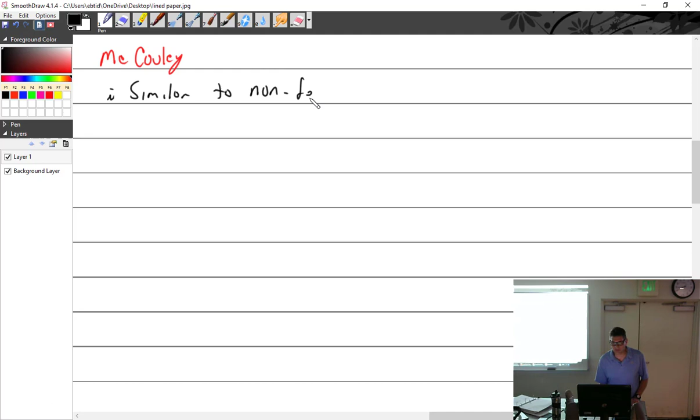Propeller is really not any different than the other propellers we're seeing. So it is backwards. Or they're correct and the single engine is backwards, I don't care how you look at it. Similar to non-feathering. We did a non-feathering before. Now we're doing feathering, now we're in the feathering system. This is technically a B right here. Can't see red, that's why I changed it to black. Similar to non-feathering model, but uses counterweights.

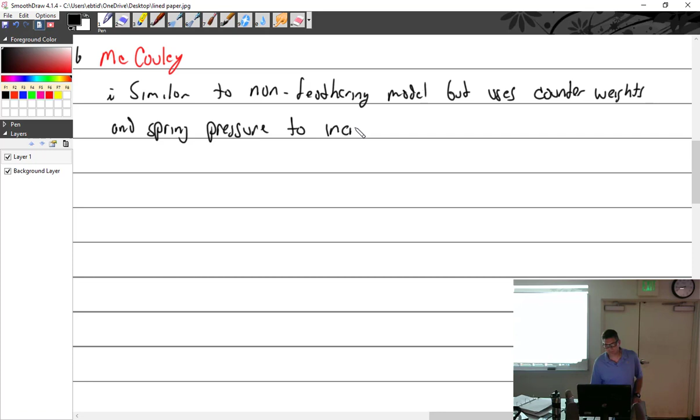Uses counterweights and spring pressure to increase blade angle. And the single engine did what to increase blade angle? Oil pressure. So now we're not using oil pressure to do that. We're using counterweights and spring to increase the blade angle and oil pressure to decrease blade angle.

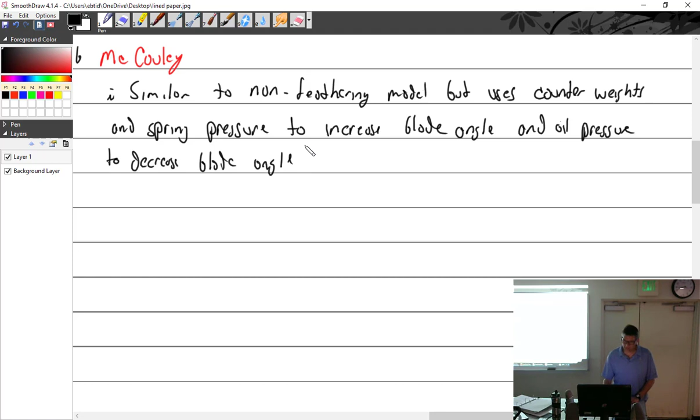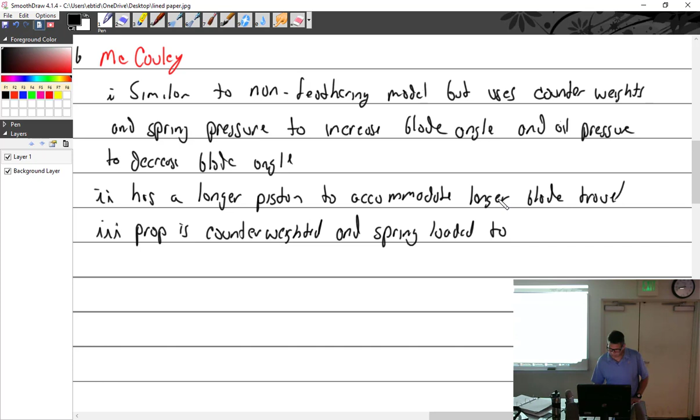Visually, they're different. It has a longer piston to accommodate longer blade travel. So the prop, again, prop is counterweighted and spring-loaded to feather if oil pressure is lost.

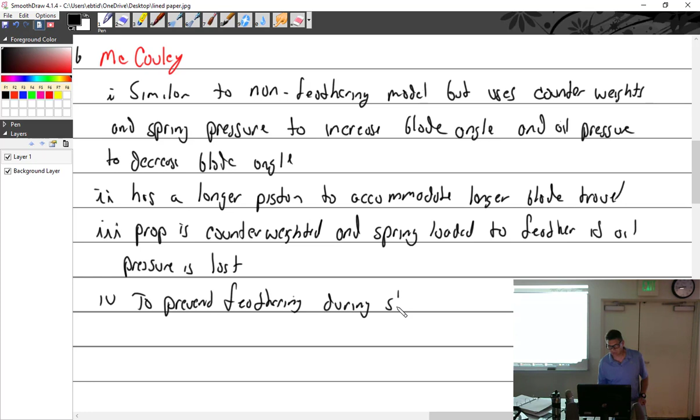Which is great. But what happens when we shut down the engine? What's the oil pressure do? Lost. Yep. And there's a big spring in there. So every time you shut down the engine, it's got to feather. But that means the starter then has to fight this paddle, and that would not be good. So we can't have that. So to prevent feathering during shutdown, a centrifugal latch is used.

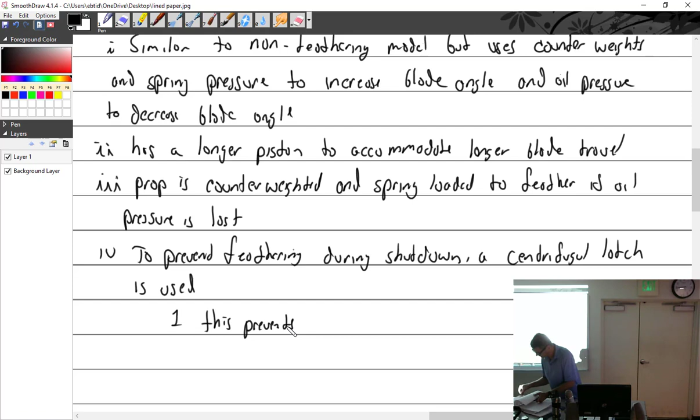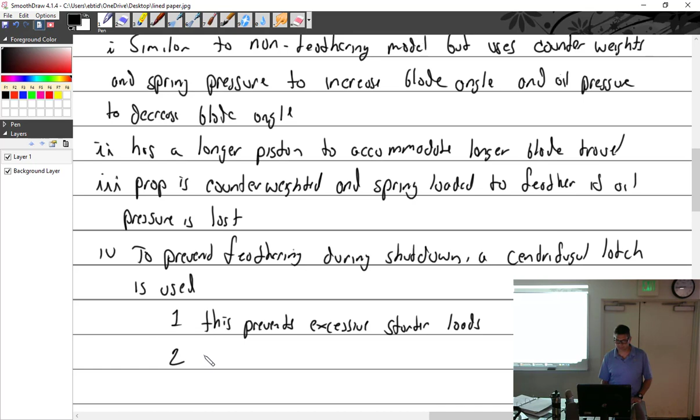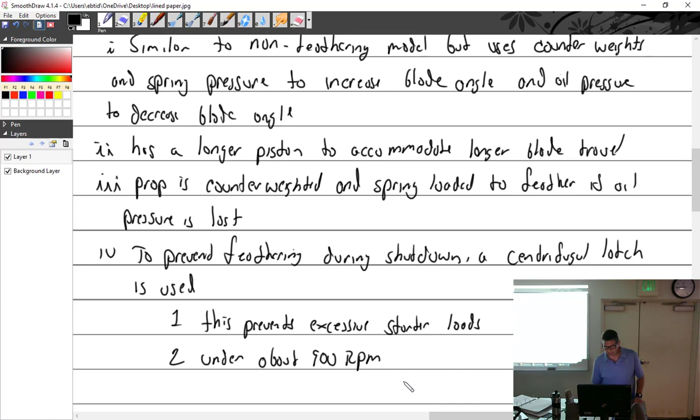Can you explain how that centrifugal latch works again? Okay, let me see. I remember we went over this yesterday. I'll write these two things. This prevents excessive starter loads. Under about 900 RPM, a latch engages that prevents the prop from feathering.

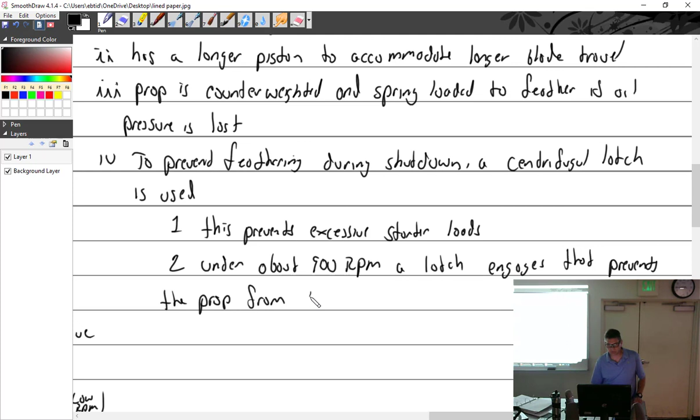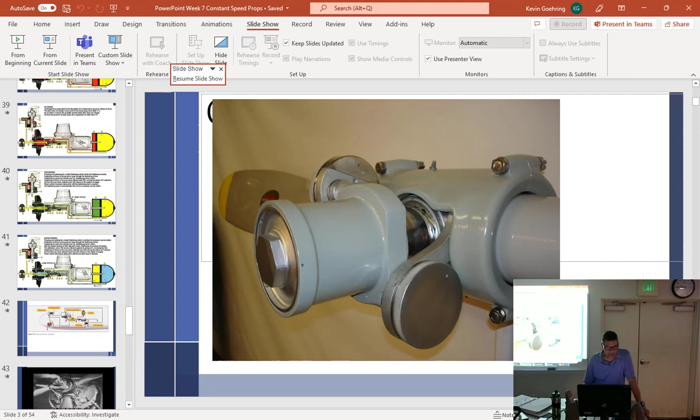All right, there's several different types of feathering locks. Let me see if I have a picture of any of them. I don't think I do. Well, that wasn't helpful. That would be negative. Okay, so I will explain. There are several different types. Unfortunately, we only have one example in the hangar, and it is oil operated, which is antiquated, no longer used.

So I'm going to let you guys figure out how to do it, because you should be figuring out how things work. That is my goal for you, to take something apart, like the governor you were taking apart. I always feel bad when you come up to me and say, I don't know how this works, where's the manual? At this stage, everybody in here can take things apart and ask, how did they make it do that? What's it doing? That's how you get this memory, so at the DME you're like, counterweight's doing this and that, I can picture it all in my head.

So we have one model of the McCauley that has an oil/centrifugal latch system. Some of the Hartzells have more of a centrifugal pin. The most simplistic version: the blade hub rotates this way. On the blade hub you can put a collar with a hole in it and a spring-loaded pin. The pin drives into the hub when the blade is like this. As you start the engine, centrifugal force lifts that pin against the spring, allowing the prop to move. When you slow down, it goes in.

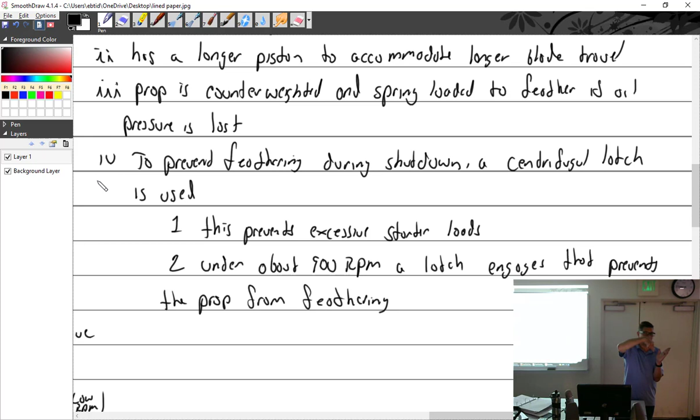Now, if the blade is at high angle, it won't catch. That's a good thing, because if you have an engine problem in flight, chances are you were at cruise pitch or higher, not low pitch. Things go bad, the engine loses power and slows down. The governor's going to try and bring it in, but in theory, before the pin catches, you would go, okay, we're going to go to feather.

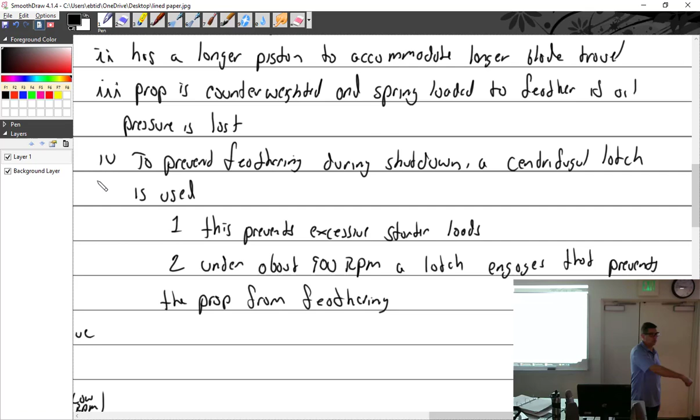So to go to feather, you're just going to grab it, go all the way to the low RPM, and then usually there's a little indent, a detent, some sort of gate, something, so you don't inadvertently do it, but you'll pull it all the way and go to feather. Sometimes you lift up, sometimes you're just way back there. Then it goes to feather, and then the locks don't work. But it's always just nowadays some sort of function of centrifugal force.

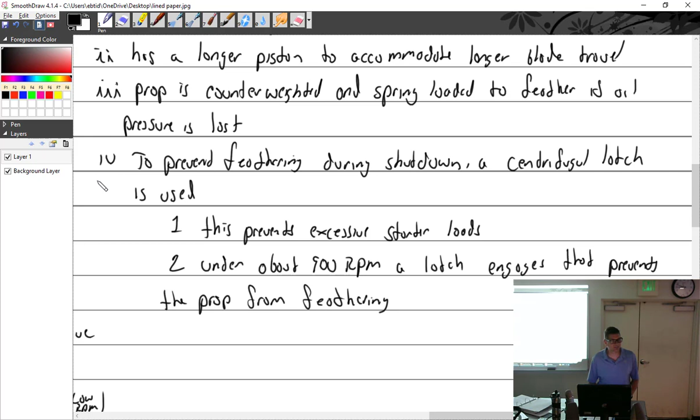Does that help? So even if it's spinning, if the prop goes too far forward, would it catch? Flat. It will, but only at low RPM. Only at low RPM. So only at about 900 RPM. Yeah, just pretty stinking low if you're flying. I don't even think you can get it that low flying without the windmilling effect. It's just going to keep it higher, wouldn't you say? You'd stall first. Yeah, so it's not a risk.

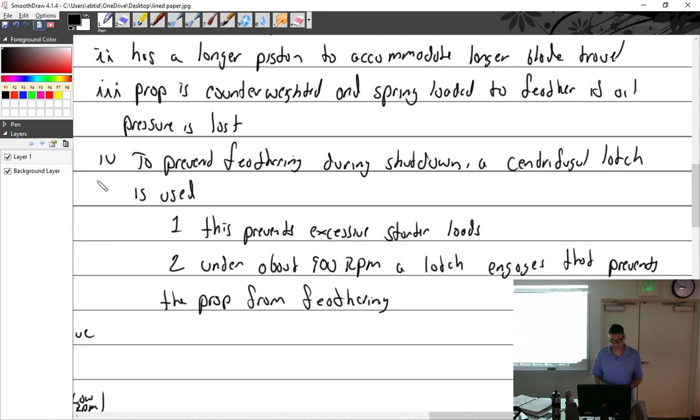And for maintenance needs, if you want to feather it on the ground, usually the way I would do it is I would just have my hand on the throttle and hand on the prop, and I'd pull the prop back to feather, and as it starts to feather, you can hear it, just start pulling back the throttle, shut down. Because you don't want to leave the throttle open and let it try and shut the engine down with the prop. That's bad.

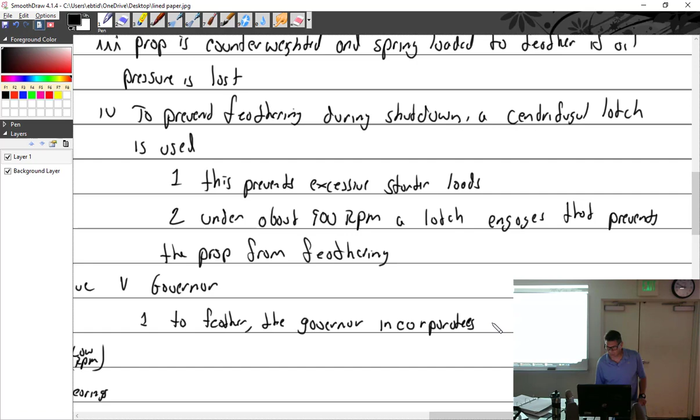Let's see. Oh, got this. Governor. Remember that thing? It's a thing that exists. So to feather the governor, the governor incorporates a lift rod, connected to the speeder rack. The lift rod mechanically grabs onto the pilot valve and moves it up into the feathering position.

So the lift, I really thought I had a picture of that, but apparently I don't. You did, I saw it. Let me see. It's that right there. Thank you. Oh, there we go. So spindle, lift rod, right in there. So it just comes in, lifts it up, grabs a speeder rack, pulls the whole thing up, realigns the pilot valve, drain off all of the oil, let centrifugal force, spring pressure, and or air pressure do its job, and there you go.

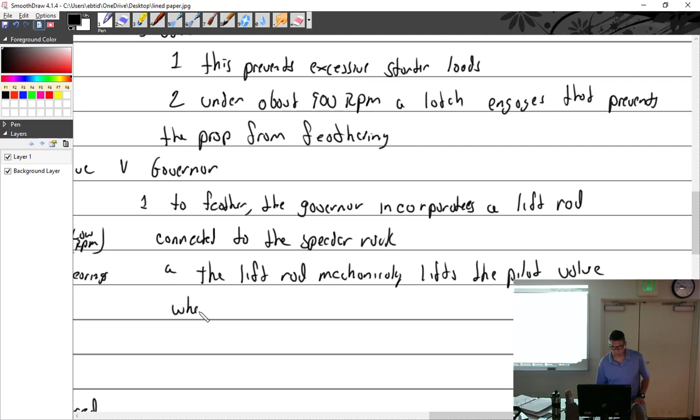What is this? 1A. So the lift rod mechanically lifts the pilot valve when cockpit control is moved to the feather position.

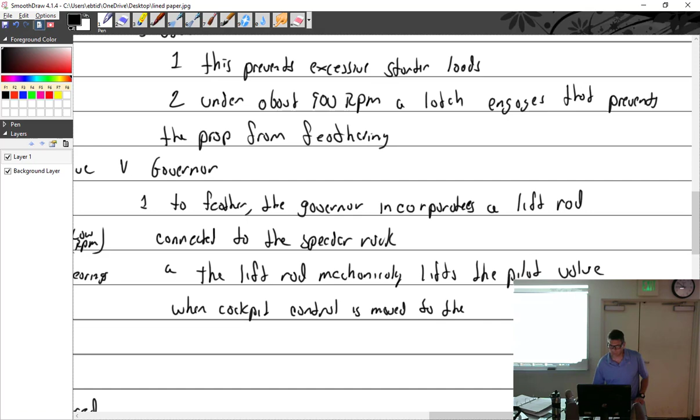All right, to unfeather. Well, you got to have a way to make it not feather. So there's a couple ways you can do this. Way number one is you've now put the prop in feather. Its blades are out. It's completely stopped. Maybe you decide the engine's okay now. Got better. Healed itself. And so you need to restart it. If you don't have any system for doing that, all you're going to do is take the blue knob, bring it out of feather, and hit the start button. And it just has to fight the air. And as the starter starts going, so is the crankshaft, so is the governor, so everything starts working, right?

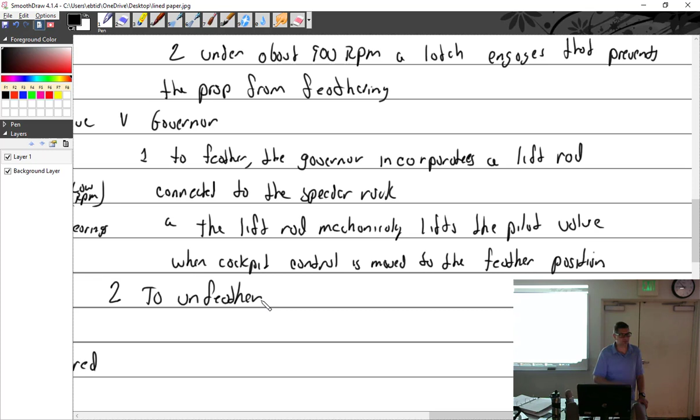And so it takes oil pressure to bring it flat. So the engine will try and start, it'll kind of get going. And at the same time, the starter is turning on the components, so it's going to start putting oil pressure up in there, and it's going to start to come out of feather. Now, as soon as it starts to come out of feather and it catches the wind, then it's going to air start on its own, and then you're off and running. But it's painfully slow. I bet it is. I've never done it in the air, but I've done it on the ground, and it's like, whoo, man.

All right. Way number two is with an accumulator. An accumulator, something that you guys are going to look a lot at. These are just two examples of an accumulator. We can look at the top one first. It looks like a toilet ball. And we have this rubber diaphragm in here. On one side is air and the other side is oil, with an air valve, which means you charge this with a bunch of air. Let's say there's 100 PSI in here. As oil fills this up, it will compress that air, leaving this oil under, say, 100 pounds of oil pressure, right?

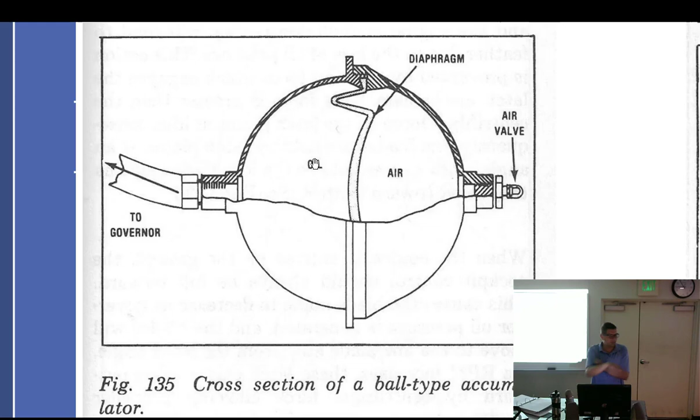And so the way that works is this is open usually to the governor. So the governor is charging this up. And then when you go into feather, it will shut off a valve, block the oil in here under pressure, lift the pilot valve, block off the oil going into this because it's all kind of in the same system. And then that keeps it charged. The prop goes to feather because of oil, because of centrifugal twisting force, because of spring pressure, because of air charge in the prop, and now it's feathered. Now when you want to unfeather, and you go, yeah, I thought this one had it.

Sometimes I'll even show the passage where it goes to the accumulator. So then when you go into the "I don't want it feathered anymore," and you push forward out of the feather, it opens the gate that blocked this off. This goes to the governor. The governor sends it right now because the pilot valve is showing that we're in an underspeed condition.

And I'm going to screw that one up. So it's thinking it's not spinning. But you're going to realign the valve in here, and then the oil goes right through here to the propeller and brings it back in.

That's ball type. And they also have the same thing, it's just kind of flat. So you could actually have a piston that moves back and forth in there. So put the air on one side and a piston that'll move, or a spring. You can even use a spring. Makes sense, I hope.

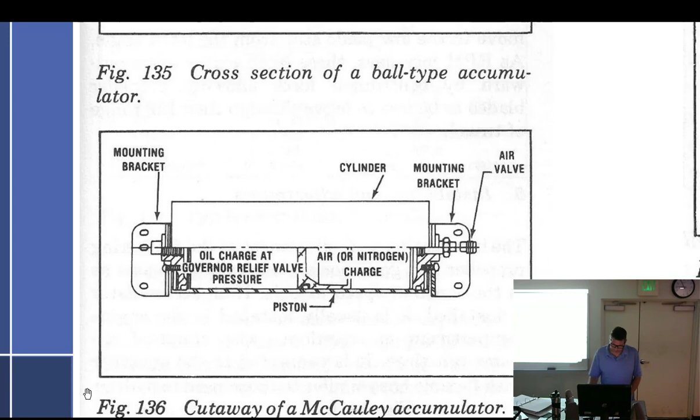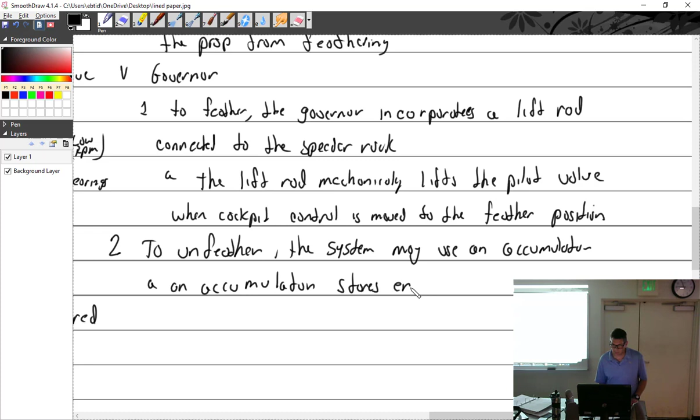Let's finish this. To unfeather, the system may use an accumulator. An accumulator stores engine oil under pressure. Yeah, that works for me. Maybe air pressure, or spring pressure.

Especially if it's air pressure, you gotta check your air pressure at annuals. And also, we often check the accumulator action. We'll go ahead and feather the prop, and then test the accumulator, bring it out of feather. Because you don't necessarily have to have the engine running at that point. It'll do it on its own. The guy on the Hartzell videos said every 100 hours or month.

Okay, that wasn't an accumulator. That's the Hartzell prop that we haven't looked at yet, where it has the Schrader valve on the front, underneath the front of it. That's not an accumulator. That's like spring pressure and centrifugal twisting force assist. It's one of the fixed forces. Thank you, that's the word it would have been much better to say. Accumulator: air pressure or spring loaded. Got that.

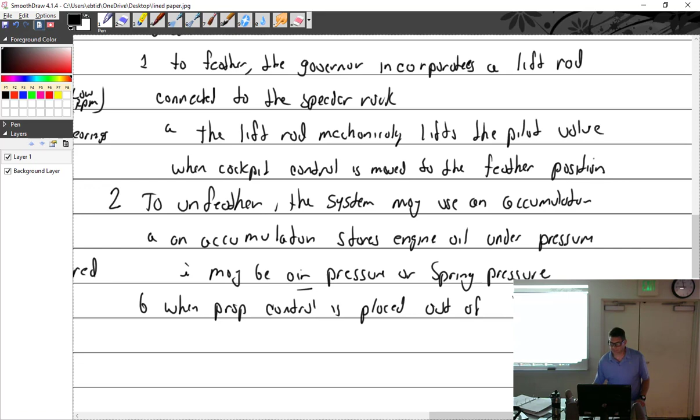B, when the prop control is placed out of feather, a ball valve in the governor will release oil pressure from the accumulator to the prop to unfeather.

I'm trying to think of the two valves, where one went to the prop and one drained off, and the pilot valve moved. Is it in line with those? Yes, it's part of that little system. Okay. What do I need to say?

Systems without an accumulator must start in feather. So systems without an accumulator must be started in feather position.

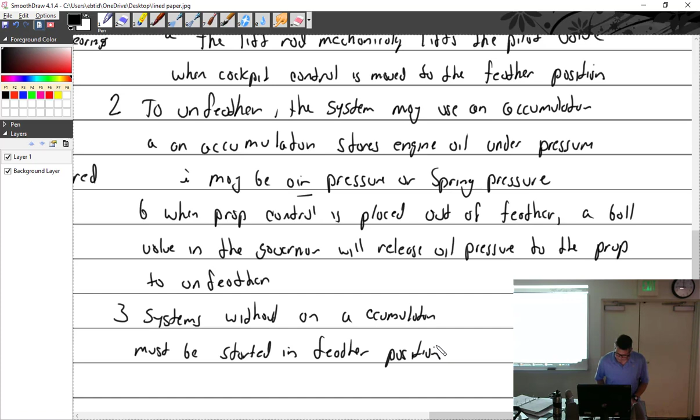As the engine is rotated, governor pressure will start to unfeather the prop. Prop will begin to windmill, helping the starter as governor pressure increases. Prop will move to low pitch. Oh, that's what we got. That wasn't really tough.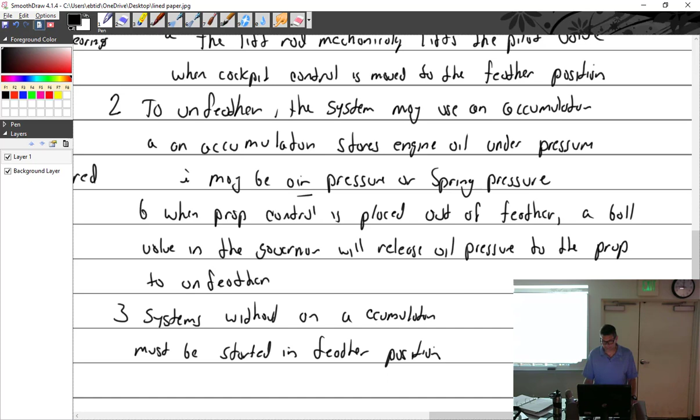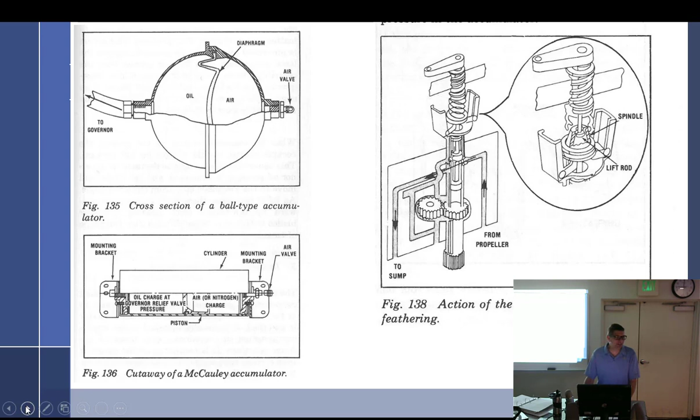Is that just because you don't have a good imagination? It's more of an imagination issue, something not right in my imagination. You tried mushrooms or anything? Not gonna answer that. Would have been funny if you would have said, you mean today? This week?

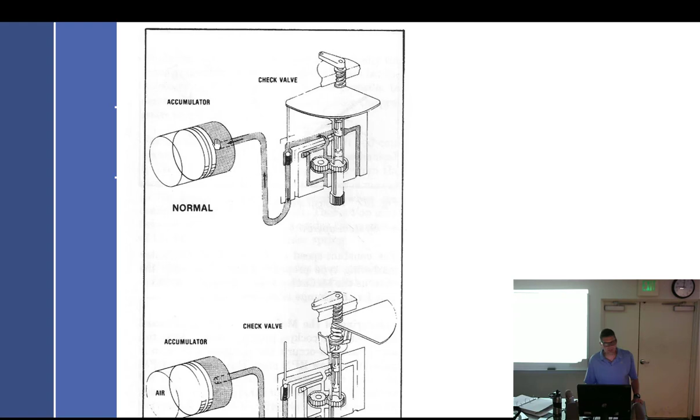Oh, look, I have a picture. Maybe I can make it smaller. There, can you see that? Accumulator. Check valve. All right, so you got a check valve. It comes through the little check valve, which means it goes one way. Comes in, charges up the accumulator during normal flight, just in case we need it. I don't know what the big plate is.

Oh, I know. It's to push down on the ball. So we go into feather without the accumulator action, right? We pull the levers all the way back, cutting off the oil pressure from the governor. Prop goes into feather because of its fixed forces.

Child. It's like being at home sometimes. 10-year-old. Older. Love you anyway, though.

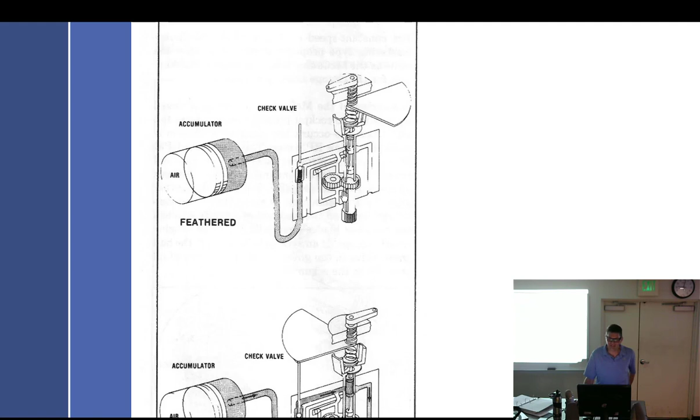All right, so it goes into feather, and they want to unfeather it. We rotate it around. This comes over, pushes down on the little ball, releases it. This comes out through, goes to the propeller, and there we are, off to the races.

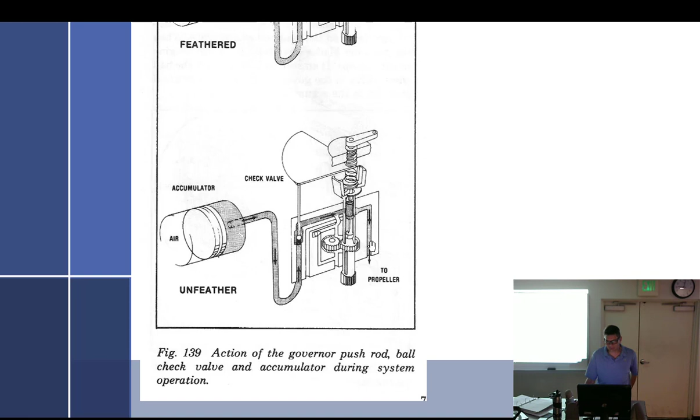All right. Where'd we leave off? Hartzell. Well, I guess I just kind of put them all together here. No. McCauley. There we go. McCauley feathering is where it kind of left off. Counterweights move prop to high pitch. Oil moves prop to low pitch. Counterweight spring pressure. All right. Underspeed oil, same with the Hamilton. Underspeed: oil to prop to decrease pitch. Overspeed: drain oil to increase pitch. All right. That brings me to.

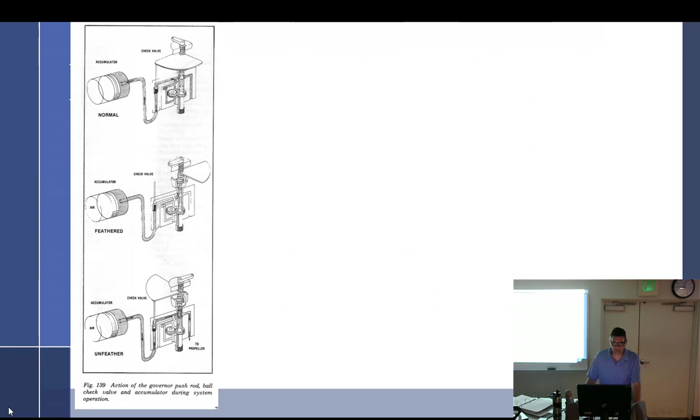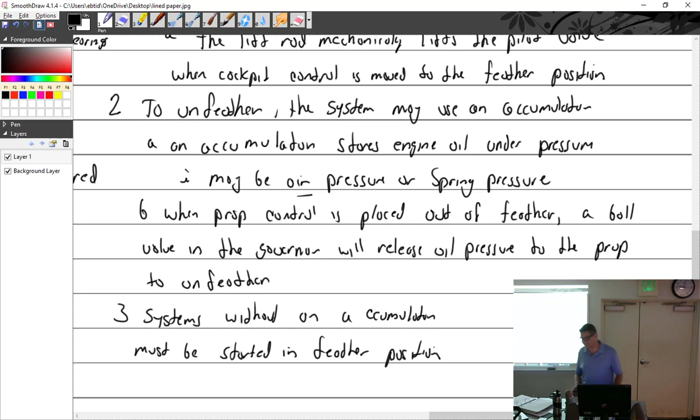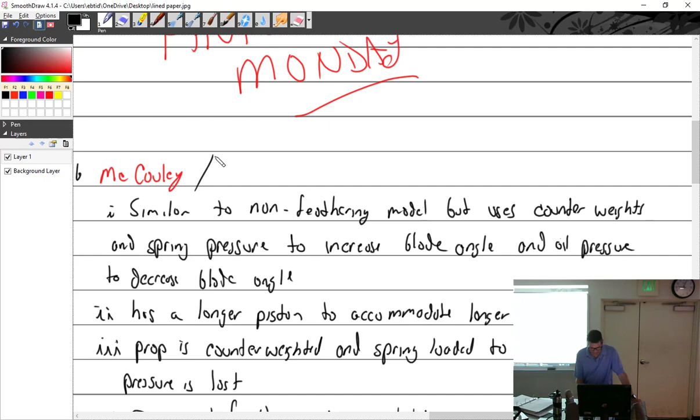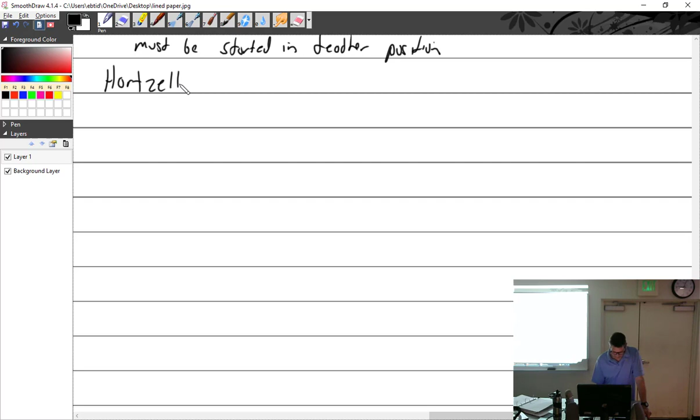I guess I just skipped right over the Hartzell pictures. Hartzell. What can we say about that? Is this less basic? Man, I don't know. It's the same thing. We could just say McCauley / Hartzell. There's really not going to be a whole lot of difference. There's a little bit, so I guess I could write some other notes. Hartzell, same thing, but different. Same as McCauley.

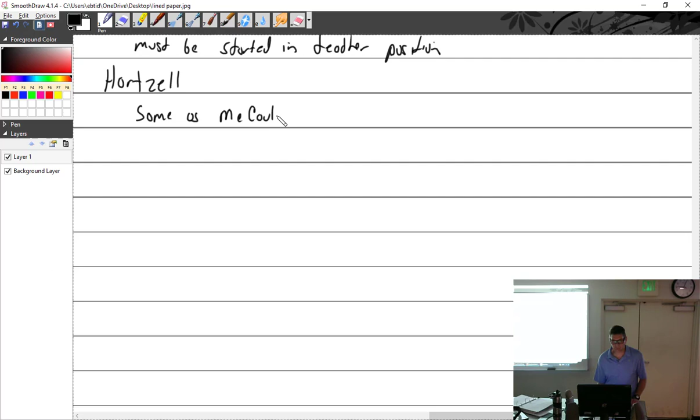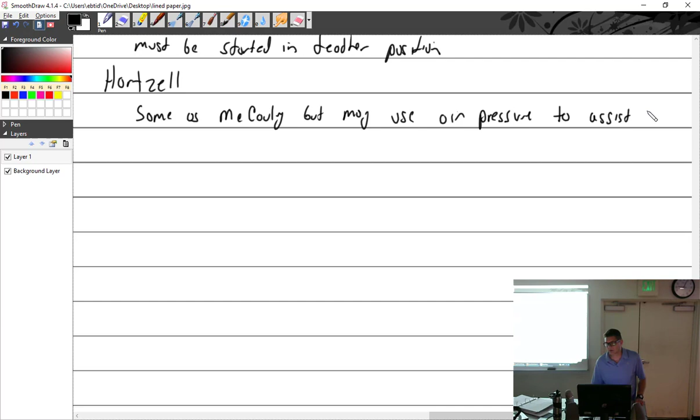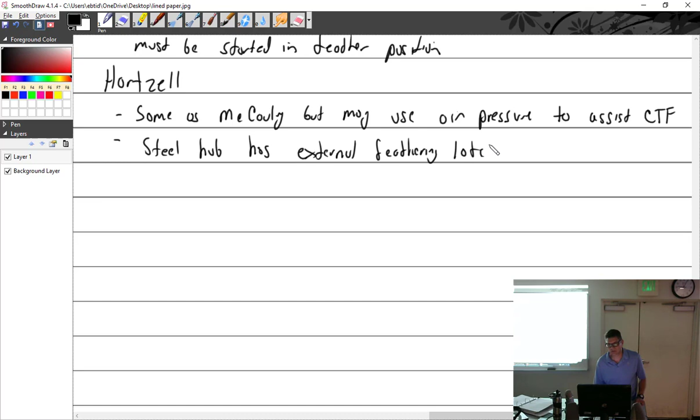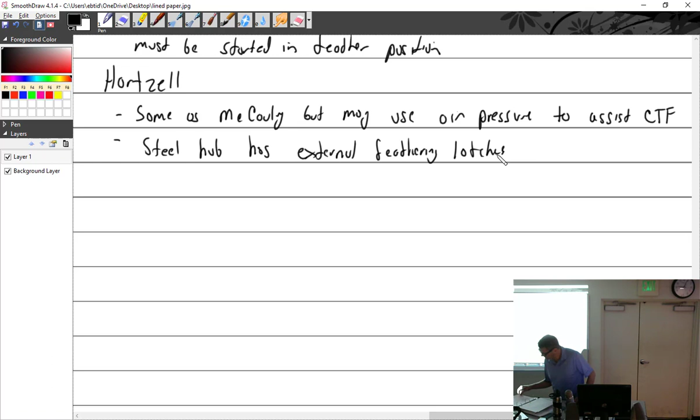But may use air pressure to assist CTF. Let's see. Steel hub has external feathering latches. Compact. That's grease. All right, so speaking of air pressure, we got that. Let's talk about operations, obviously the same. So maintenance.

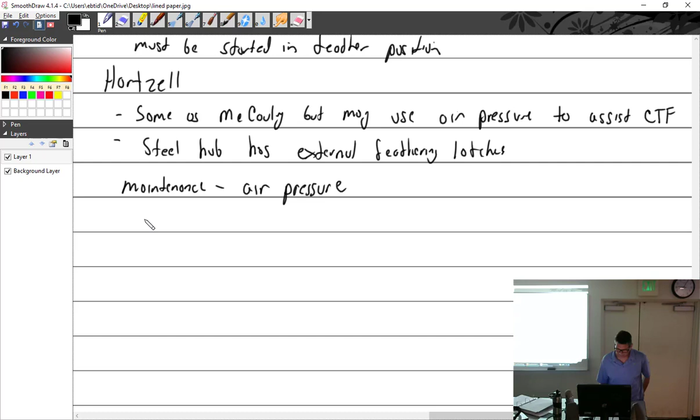Maintenance. Let's talk about the air pressure. How often is that checked, Tobias? Every 100 hours or month, whichever comes first. Yep, and I know aircraft owners have it in their iPhone. Little alarm goes off: I got to go down to the airport and check my air pressure, it's been a month. Because you ask some owners how often you check the air pressure in your prop, and they say, air pressure? I've never heard of that. Some props will need the air charge checked.

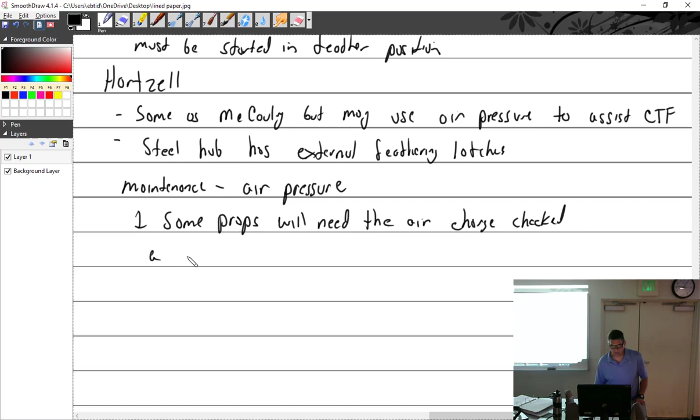Air pressure is about 150 psi. Follow the chart. There's a chart where you put the air charge in, and it tells you at what temperature you're at, how much air pressure should be in the propeller.

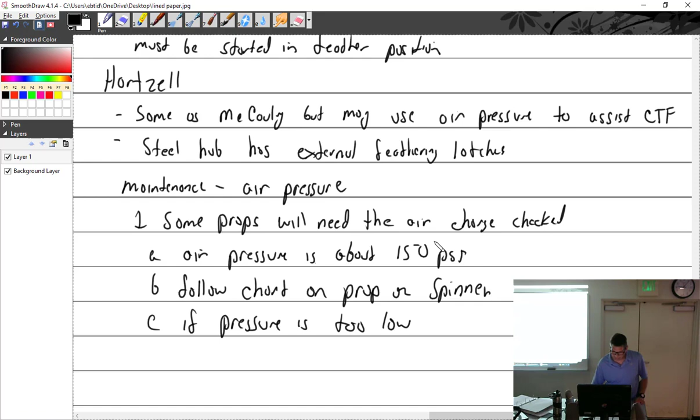So if pressure is too low, what's going to happen? You're going to get too much oil pressure? It's a Friday. If air pressure is too low, you don't have enough force, so what problem would that lead to? Not enough assistance. Can't go to feather. Yeah, not enough assistance towards feather. So it may not feather. Also, it may surge or overspeed.

Why would it overspeed? Because it's too low of an angle. Yeah, too low of an angle. Air charge isn't bringing it over. So surging is kind of looking for its right spot. Would that be like bootstrapping, where it overspeeds and continues to overspeed? No, it's just everything is behind. By the time it finally starts moving to high pitch, it's like, now we need to speed up, but it can't. Then it starts to speed up and goes too far that way.

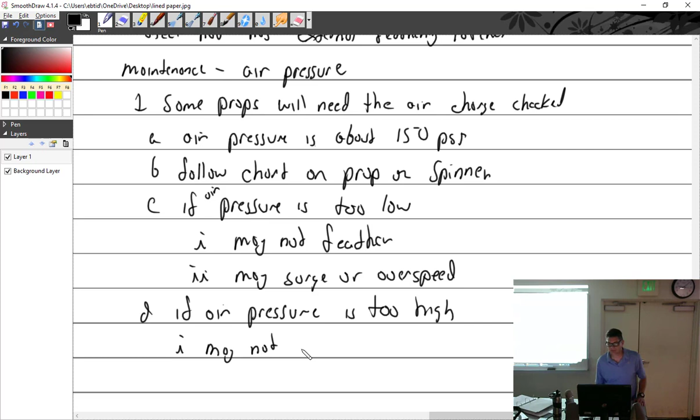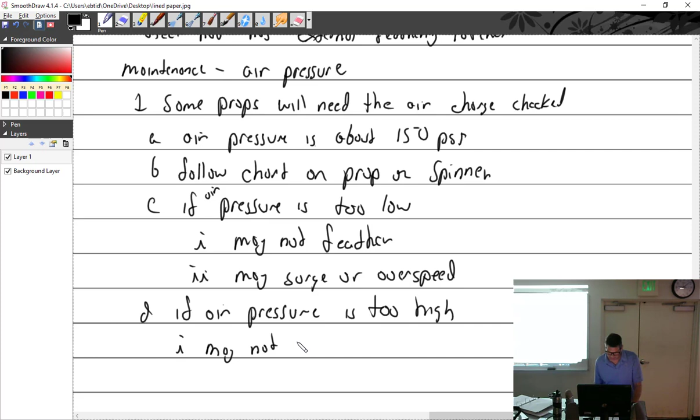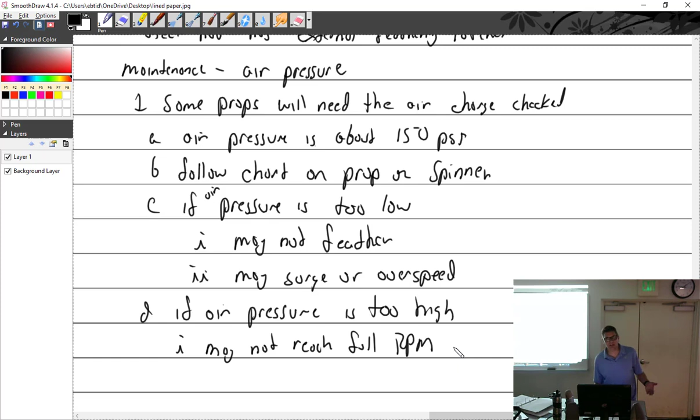So if air pressure is too high, what do you think? During normal operation, it's going to be too high of a blade angle. You don't have enough oil pressure to counteract and bring it to low pitch. It will try and go to feather, to high blade angle. May not reach full RPM. Yeah. So you're right, it may not go to low pitch, but you have to think about what's the symptom. It's really hard to get that little protractor on when the prop's moving.

So just gonna sit on the hub. Well, you got to get a buddy your same size on the other side of the hub. You're out of balance. Oh yeah, that's right. And that way you can check both sides at the same time. Teamwork. I'd puke.

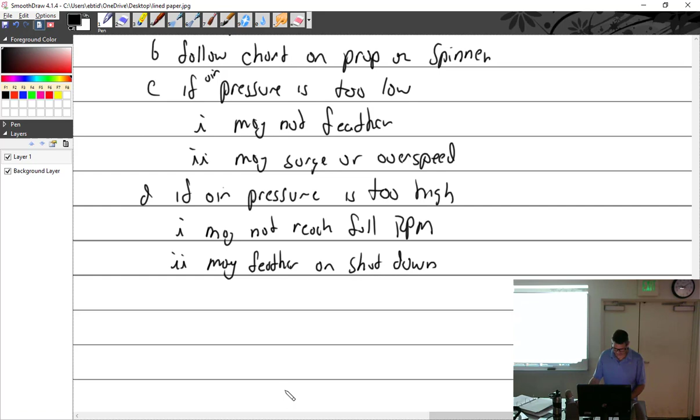All right, we did that. We're doing this. So Hartzell steel hub full feathering, Hartzell compact feathering air counterweights oil, and Hartzell compact feathering air oil. Hartzell compact feathering air oil has no counterweights, apparently. But what does it use instead? Air. And? Oil. Very good. Moves prop to low pitch: oil pressure. Those are all twins. Moves prop to high pitch: counterweight spring, air pressure and counterweights, air pressure and spring pressure. And of course, we've covered that.